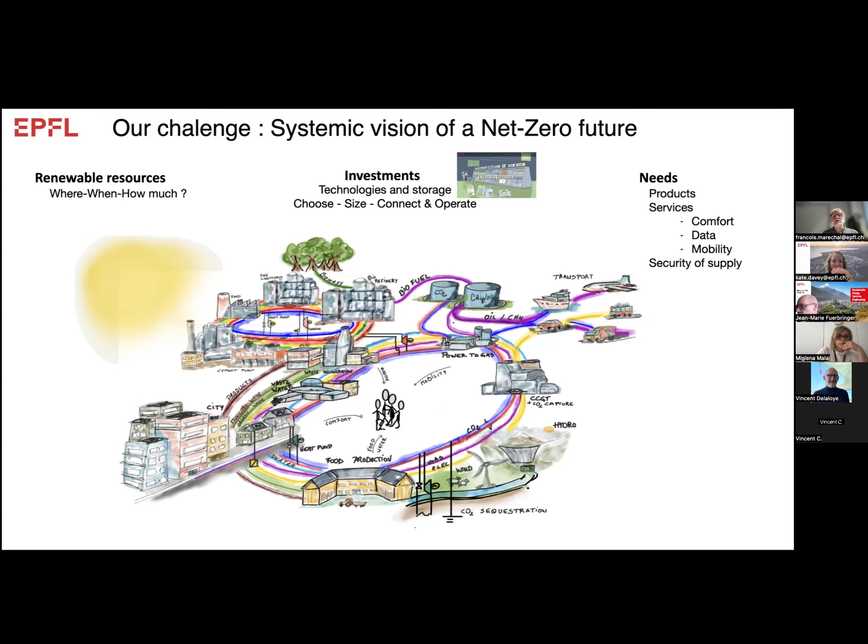And then we have to activate the technologies. This means deciding which kind of technology we are going to buy, at which size, for which purpose. So the question is more or less: we have to choose the technologies, size them, connect them, and then be able to operate them.

And if we have to take those decisions, then we have to have metrics that allow us to take them. I will name them the sustainability metrics, because we would like to be living in a world that will maintain its habitability.

Therefore, we will not only have to take decisions based on economic criteria, but also on the value we give to our environment—an environment where well-being is important, where the quality of the environment is important, where the health of the people is important.

And we also have to integrate the planetary limits into our decisions. So we have to recognize that we are impacting the world in which we are living.

An important dimension, as we phase out fossil fuel use, is that we will also have to look at more circularity. It means thinking about transforming waste into new products, or transforming the energy of the waste into energy services. This also introduces a new nexus, the wastewater-energy nexus, that needs to be integrated into the system in front of you.

And as we care about future generations, we also have to look at the greenhouse gas balance, which results in the need for CO2 sequestration. So this is the problem as stated. Now we have to see how we are going to do it.

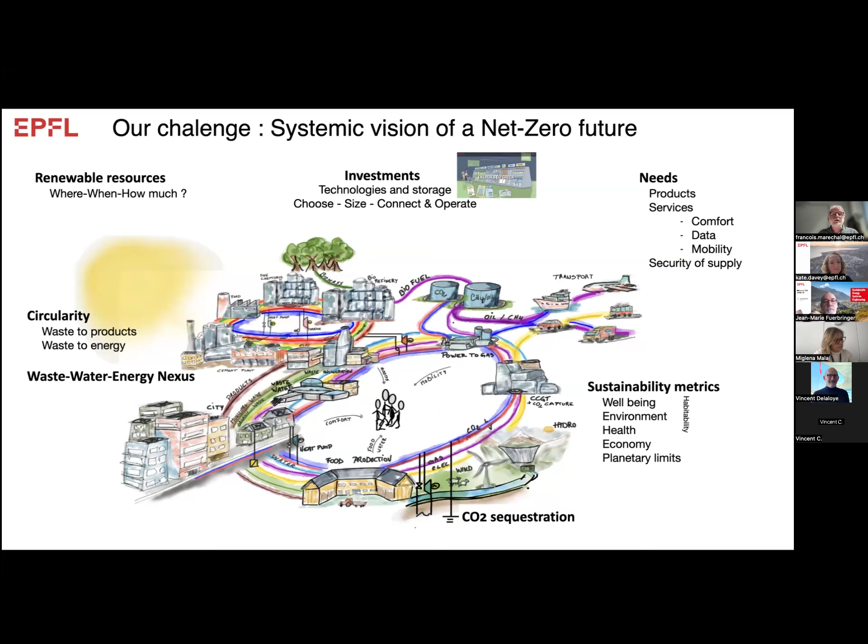Today, with the technologies we have, we can imagine a virtual system that is able to know what data and innovations are available. We can imagine that a computer can assemble those solutions to show us the good ones, quantify the impact of those decisions, and activate the capital. This is the concept of a digital twin that would show us where to go.

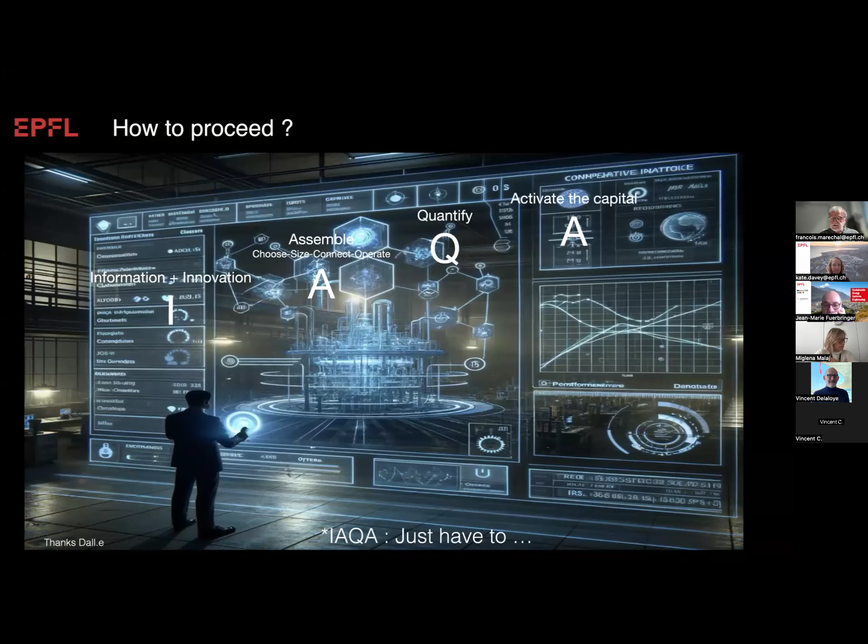And this is where we are doing research at EPFL. We are working on integrating innovation into databases, into models that show how the technologies can be interconnected and operated with one another.

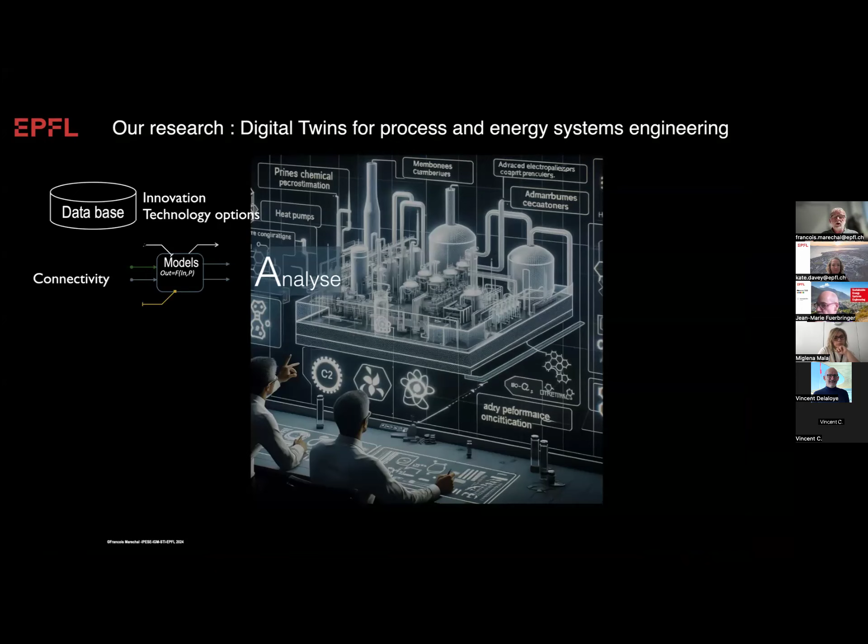We are able to use those computers and those models to generate a list of good connections—choosing the technologies, sizing them, connecting them, and showing how they can be operated. This results in a list of options that can then be proposed for interpretation and evaluation.

So we are going to measure for each of the generated configurations the performance in terms of economy, in terms of thermodynamics, in terms of environmental impact and sustainability, to finally help the people taking decisions. And the decisions will be, by definition, a compromise between different criteria, where we would like to know what is the difference, what is the risk, what is the impact of those configurations that we can generate.

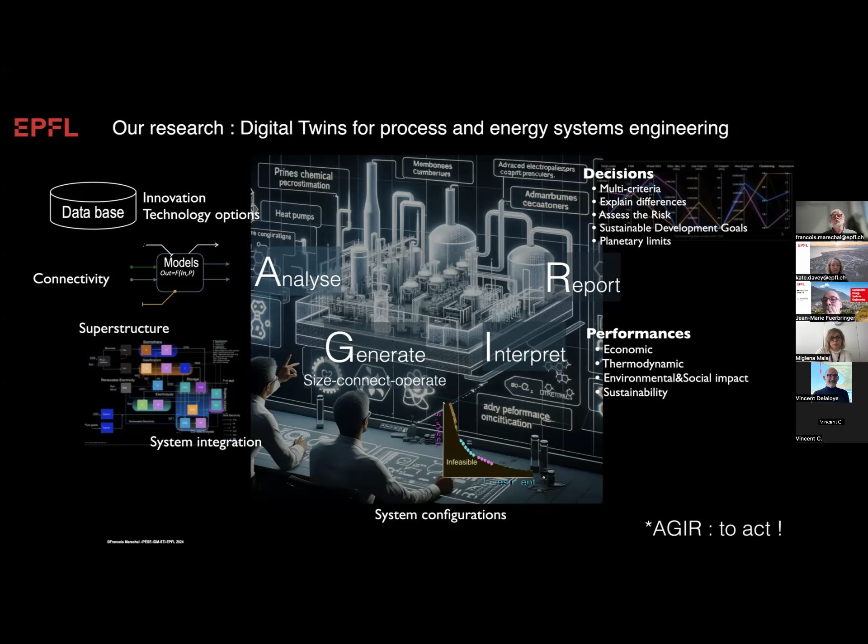So the digital twin approach allows us to see what are the good options. Now the question is, how do we implement it? And I would say start by a simple example. So typically you know where you are and you know where you would like to go. And something that would be really nice is to be informed: with the same amount of money, can you still decrease the emissions, or with the same level of emissions, is there a cheaper solution than the one that you think is the best?

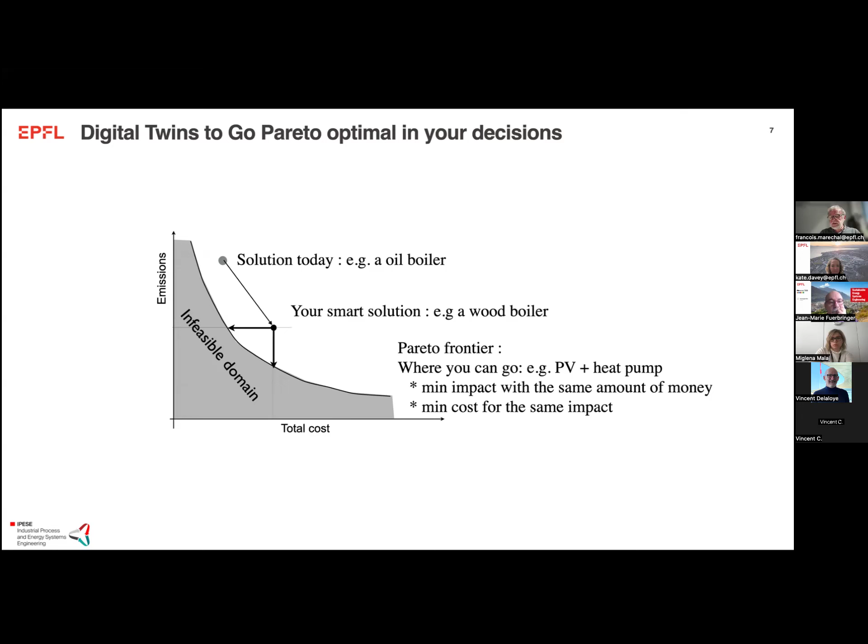And so the idea here is really to be able to take those decisions. And for doing this, we have to go into a systemic analysis. And the systemic analysis is going to look at different domains. So for example, the urban system domain, what are the technologies that have to be activated, how they will be interconnected into the infrastructures, and how this will appear for the different stakeholders.

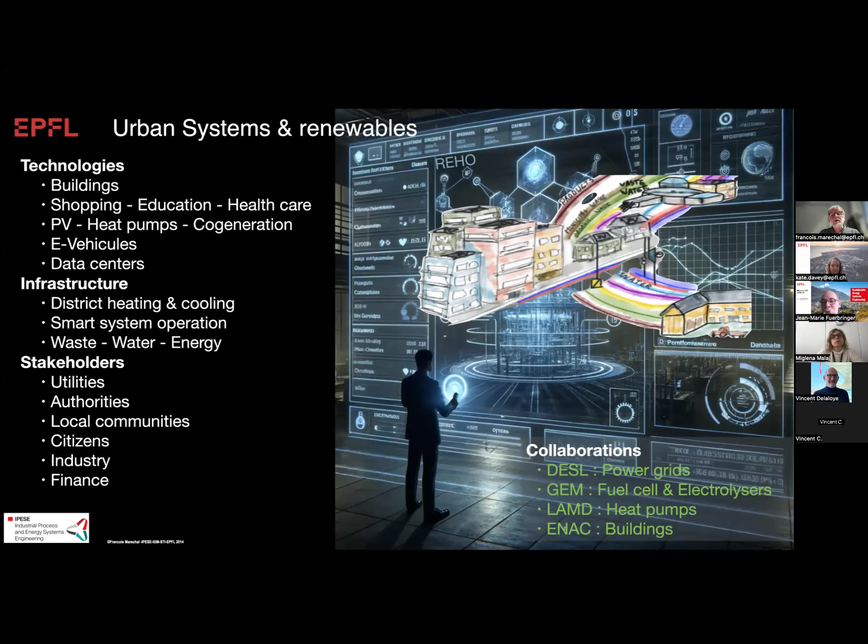So if I'm taking the city, you will have to look at the buildings, but at the same time the PV panels, the heat pumps, the shopping malls to be integrated with the electric vehicles that will come, with the data centers. And you can see that I can start brainstorming. And if I am the utilities, the representative of the authorities, or a simple citizen, I will probably have different preferences. So the goal is to be able to assemble in a system the different options.

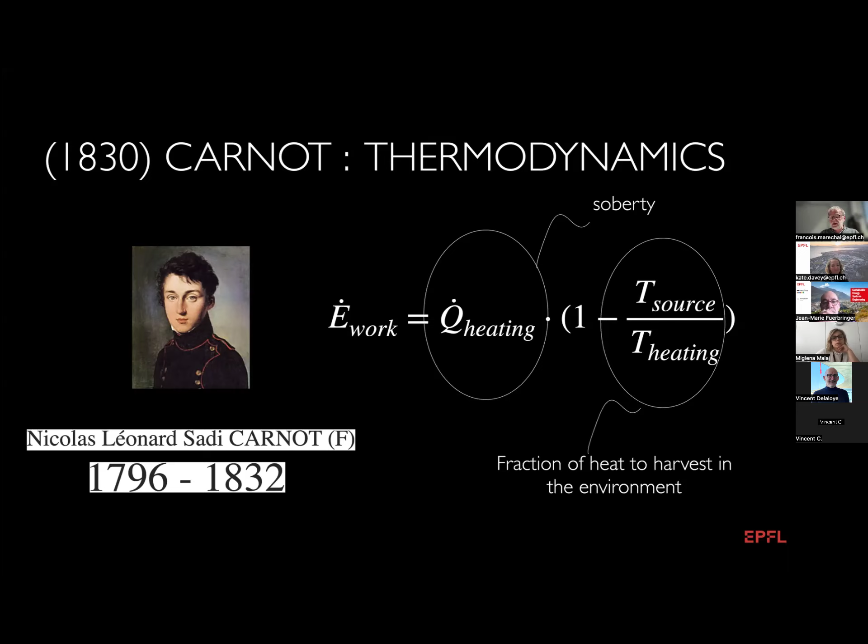And this is what we try to do by activating, on the one hand, thermodynamics. So Carnot has shown us the way. Carnot is going to say, first you have to be sober. Then you have to get the energy from the environment as much as possible. And then the rest needs to be converted. And this results in a building that has PV panels on the roof, a heat pump inside the building, batteries, and also a hot water storage tank.

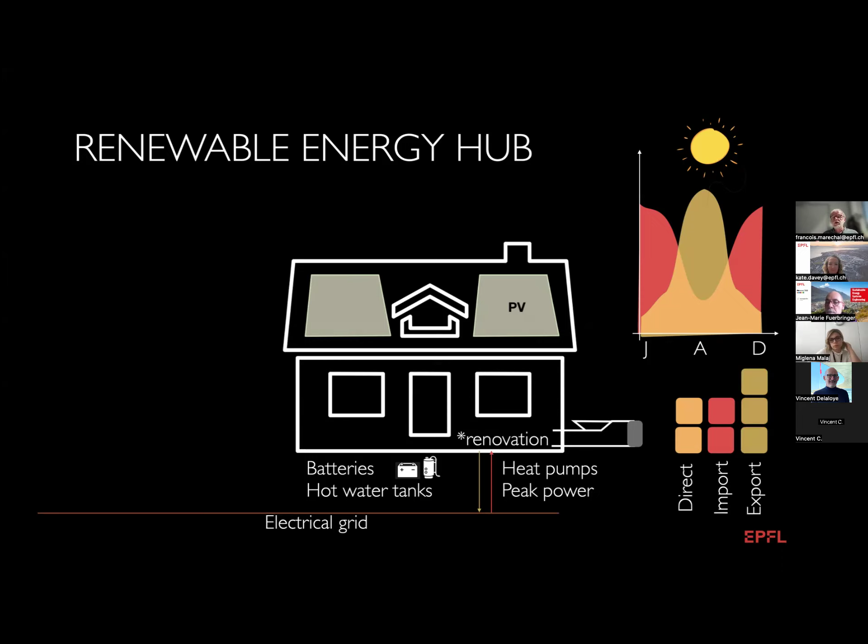So why do I need batteries? Why do I need tanks? It is because the sun is not shining at the time at which I'm going to use the services. And this then requires coordination. There will be times where the energy is available for my needs. There will be times where I will have to import energy, and therefore I will connect the buildings to the grid. But there will be times at which I will export, and I will profit from the fact that someone else will probably need the excess energy that I have produced on my roofs.

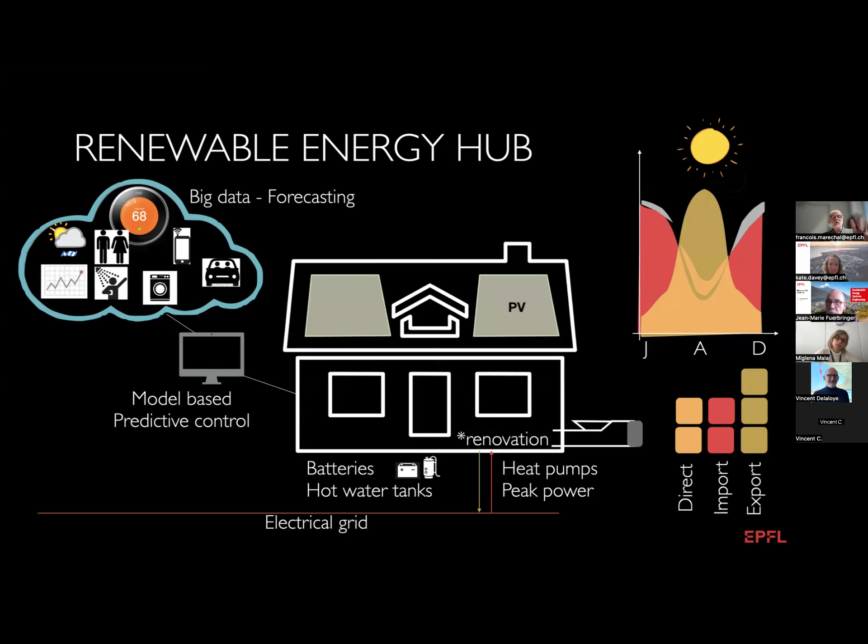And this is going to need coordination. We need an integration with intelligent systems that are going to make the link between when the sun is shining and when the people take a shower, to finally be able to operate the system and maximize the self-sufficiency. When I'm doing this, you can see that I have integrated a lot of competencies, from the data scientists to the technology developers.

Then I will be able to show how much it will cost in the future to be heated as compared to today. And when I'm saying today, this was the results in 2023. And in 2023, the system was already cheaper than today to heat the people, but with a big difference: a huge investment to be made and a low amount of energy to be bought.

On the other hand, if now I believe that I rely on Putin, so this is the security of supply, you can see that it is even better to go towards renewable energy, because it will be even cheaper to be heated in the Putin era. The reason for this is that I'm going to get much more value out of the excess electricity that I'm going to supply to the grid.

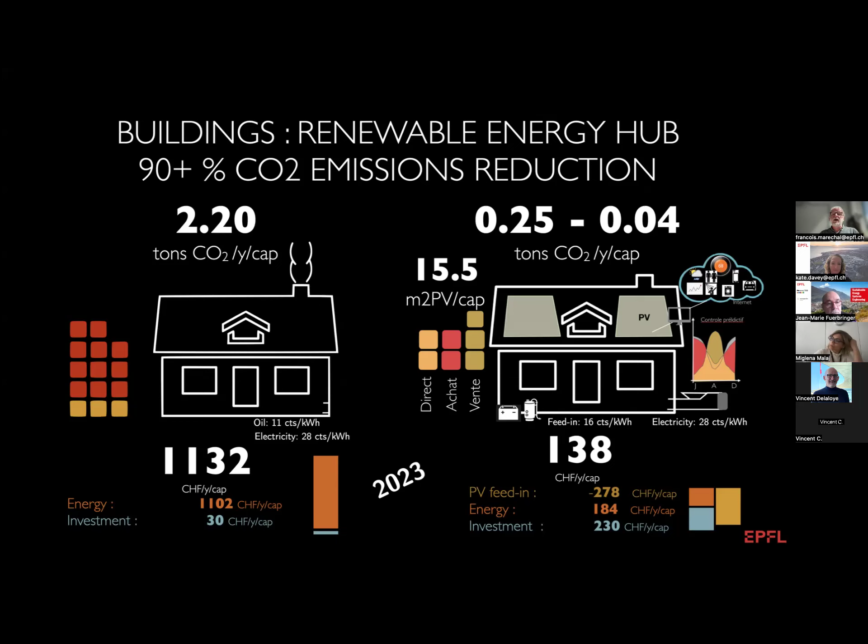So this is interesting because now you can see that I have a system that is telling me, okay, at the end, you have to move towards new decarbonized systems with 90% CO2 emissions reduction. And of course, I can be really smart. So not only will I integrate a heat pump, but I will renovate my building. I will buy PV panels. I will buy an electric vehicle. I will also probably integrate a data center into my building.

And by combining all those elements, which all correspond to my needs, what I realized is that for the services, so here it's the mobility, the comfort in the buildings, the data supply, I'm able to have a system that is much cheaper. So here you can see that I have reduced the cost, and those are the costs with the prices of today, by two-thirds. So I'm going from 100 to 30 Swiss francs.

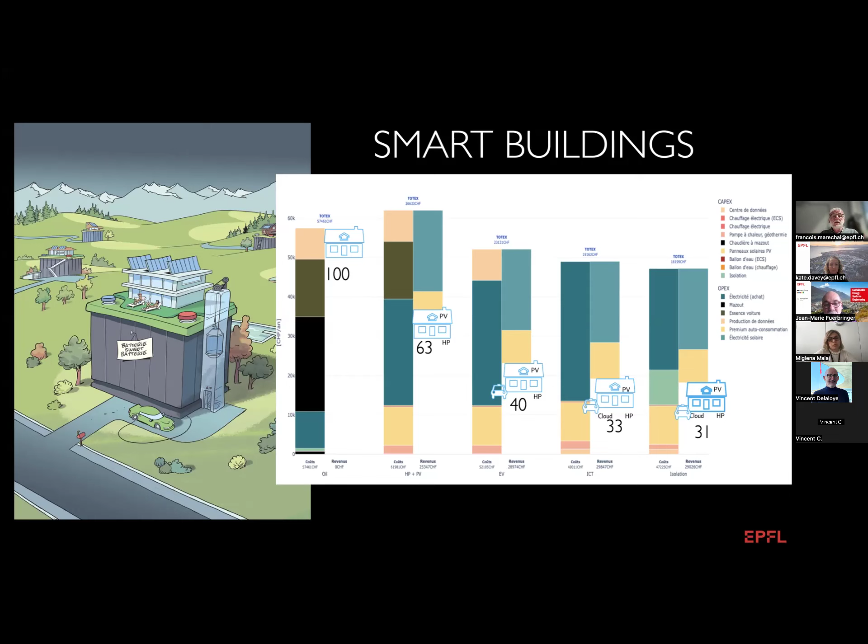And this is even more important if instead of being an individual, I'm looking at a community, like a district. When I'm looking at the district, I need to know who is who and what are the different usages and opportunities there, how I can interconnect the buildings with one another. But the conclusion of this is that at the same feed-in and feed-out prices, we were able to show that if people start to buy the equipment together, they will buy more PV panels, they will reduce the CO2 emissions more because they will need less from the grid. And they will finally recognize that there is an interest in working together.

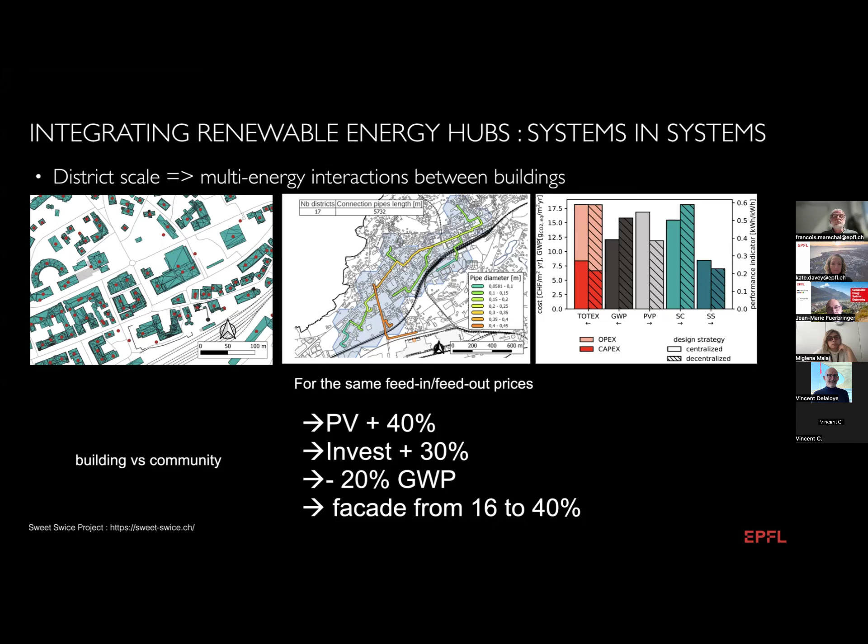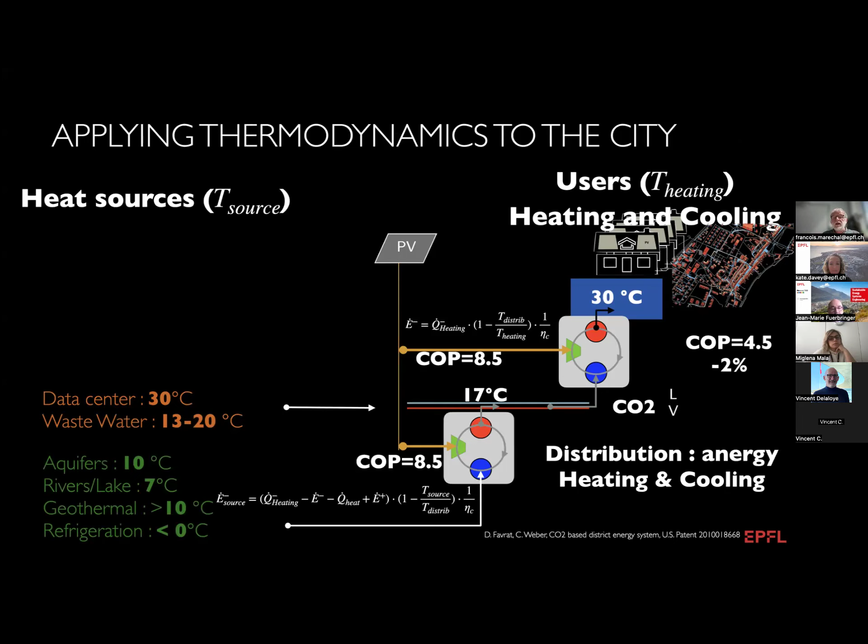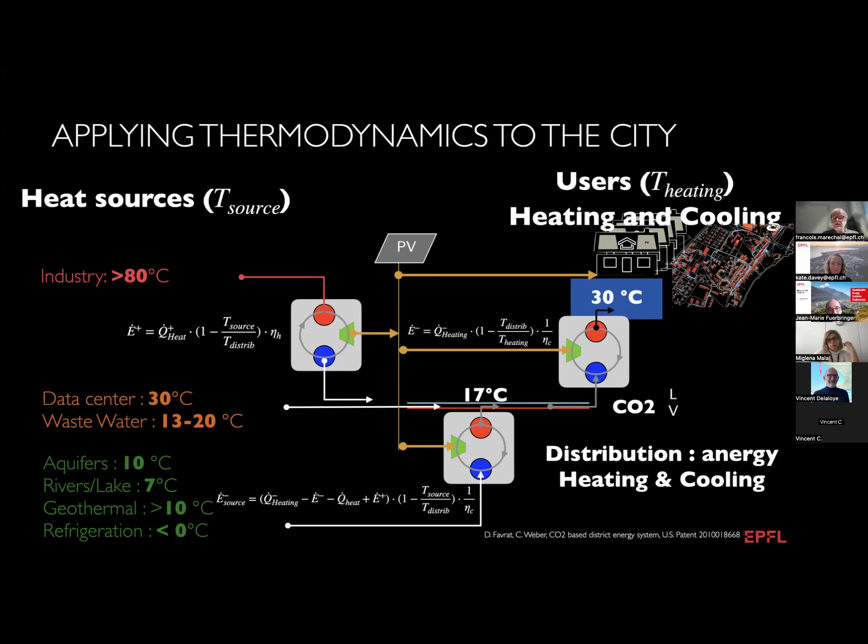Something which is also important is that I'm not just looking at the electricity, I'm going to look at the multi-energy system. Carnot is telling me that you have to choose the good sources, and this is what we are going to do. So with a district heating system, we can harvest the heat where it is available, being in the environment or as waste heat, and I can even convert the waste heat that I have into electricity before distributing the heat to the buildings. What you can see there is that I'm integrating the system in a multi-energy way, and the consequence is that I can make cities much more energy efficient and reduce their energy needs.

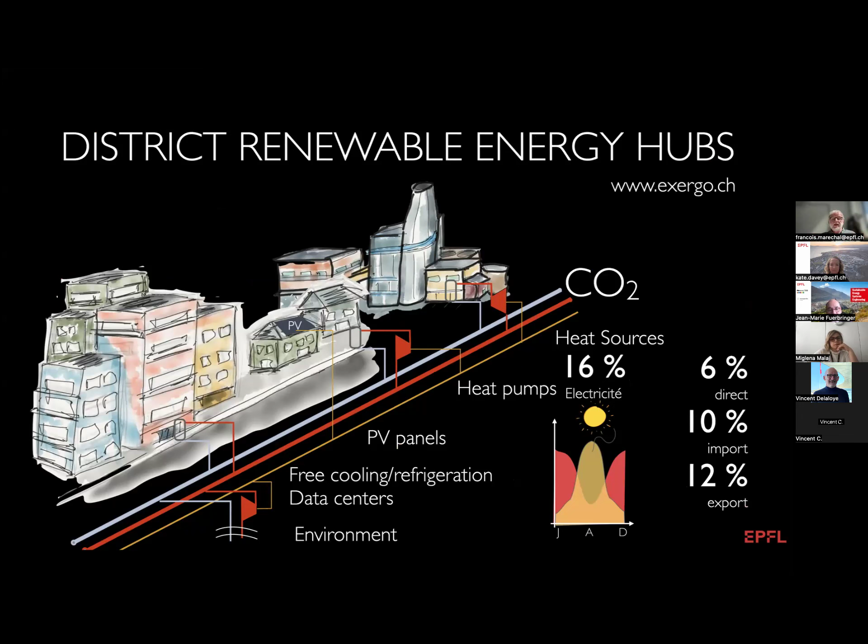The study we have made in the city of Geneva, for the city center of Geneva, shows that we can reduce the electricity consumption by 16% just by integrating the system with the right infrastructure. Something which is also important here is that I still need to do the import and the export. And that's where the technologies are going to come into play.

And this is the second dimension of the systemic analysis: the integration of technologies, being batteries, fuel cells, electrolyzers, but also other types of resources like biomass. And at the same time, it will introduce the need for, or the opportunity for, CO2 capture and storage. And something which is also important there is that each time I speak about technologies, I will ask myself, how does it connect to the infrastructure, being the power systems or the gas infrastructure. And when I'm speaking about the gas or the power infrastructure, I'm going to start speaking about energy management and large-scale energy management. So when do I activate, for example, the hydropower?

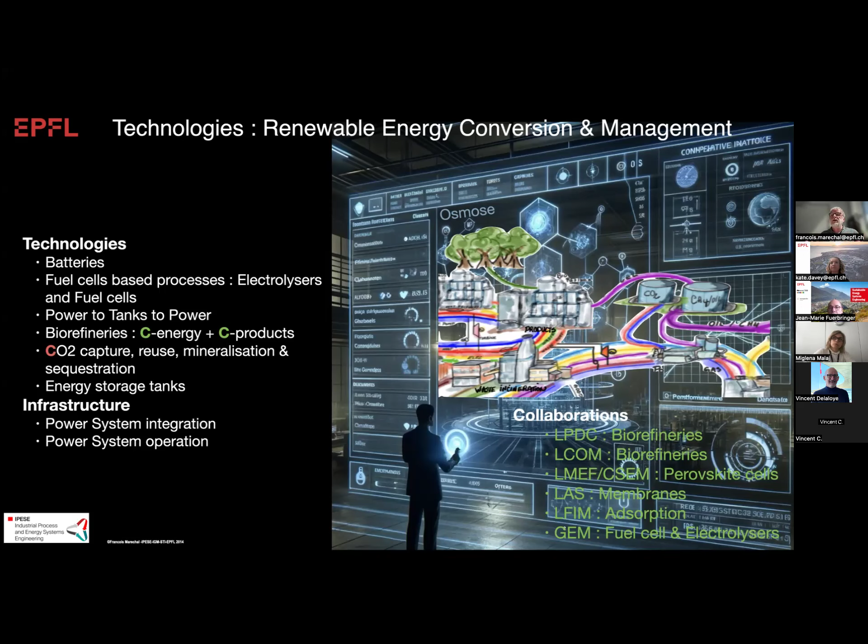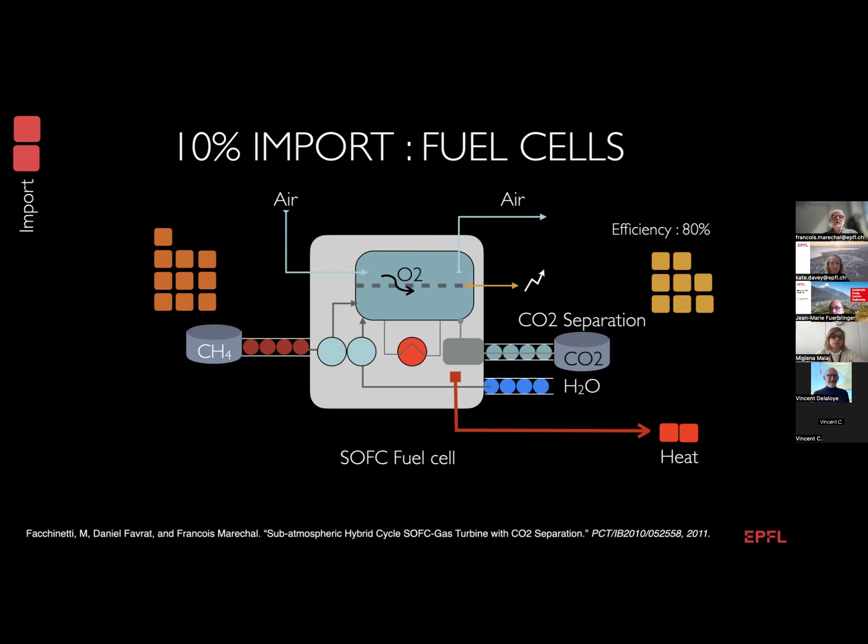Just some comments about the technologies. Fuel cells can be used in order to supply the electricity that is missing. Fuel cells also allow CO2 capture. So it means that if I have a storage tank, then I can store the CO2. And the fuel cell is also going to supply heat. So now if I can reuse the waste heat, and I have shown you that with district heating system integration I can harvest the waste heat, then I will be much more efficient in supplying the needs with methane. But reversing this system is also possible.

And in this case, I will use electrolysis. So I'm inverting the voltage of the system. So instead of producing electricity, I'm going to consume electricity. Instead of producing carbon dioxide, I'm going to reuse the carbon dioxide, and I will produce methane.

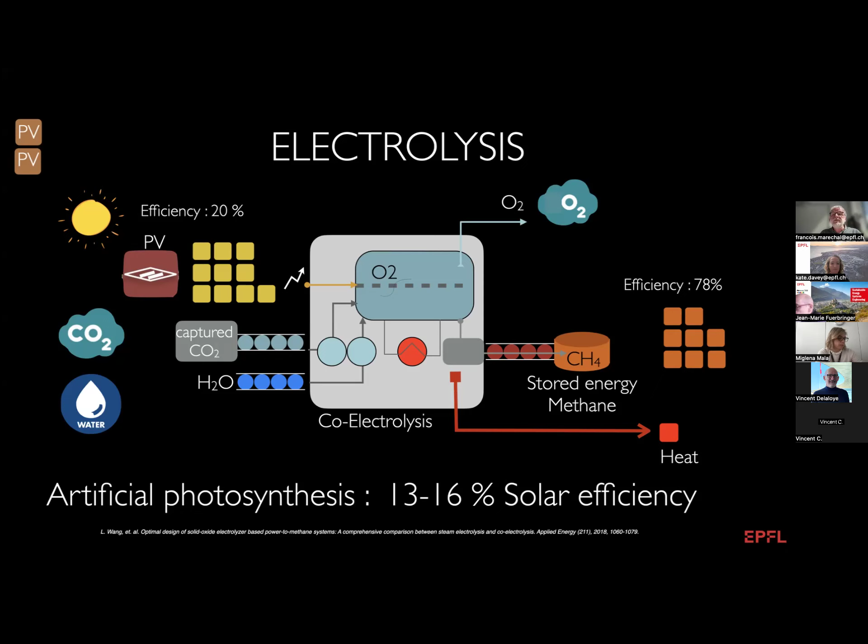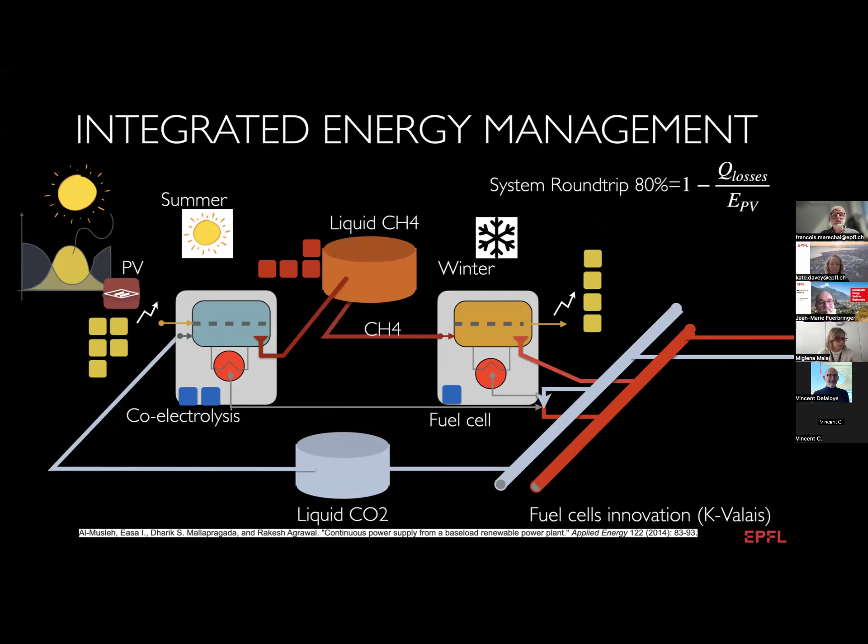And if I'm now integrating this technology in the system, then I will have a system that in the winter is going to consume natural gas to supply the electricity for my heat pumps, collect the heat and harvest the carbon dioxide that will be stored, wait for the summer, when this carbon dioxide will be reconverted into methane by using the excess electricity that I have on my roofs. And by doing this, I will already be quite efficient.

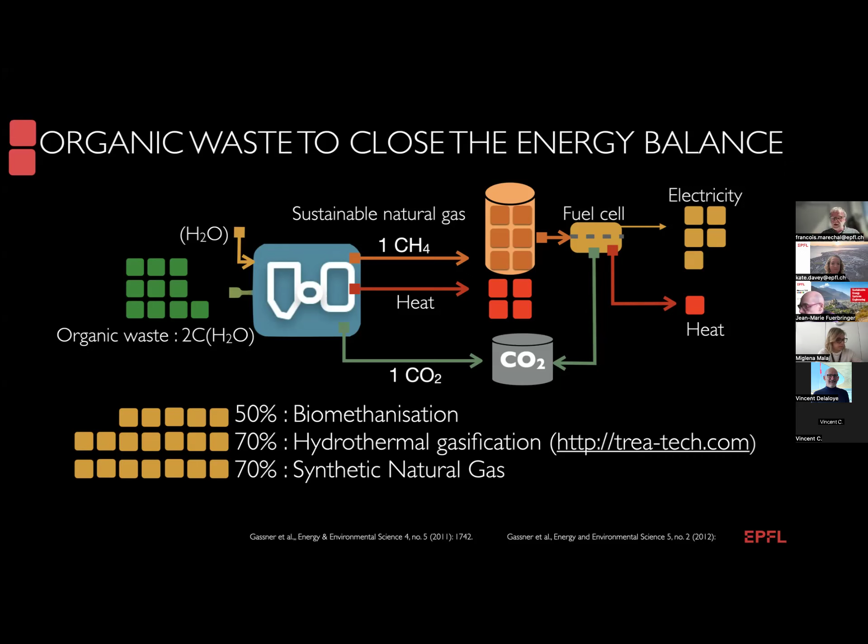But at the same time, I will realize that the people do produce waste. And part of the waste that the people produce is organic waste. And if I now activate technologies that allow to convert the energy value of the organic waste into useful services, I can, for example, activate biomethanization or gasification techniques that will produce methane out of my organic waste. And the byproduct will be carbon dioxide. And I know how to deal with the carbon dioxide.

So I'm going to propose now systems that are not only going to convert the energy of the biomass into stored energy in form of methane, for example, but I will have also the opportunity of converting the byproduct, which is carbon dioxide, into an additional amount of methane, provided that I have electricity available on the grid. So now I have a seasonal storage device that is integrated to my system.

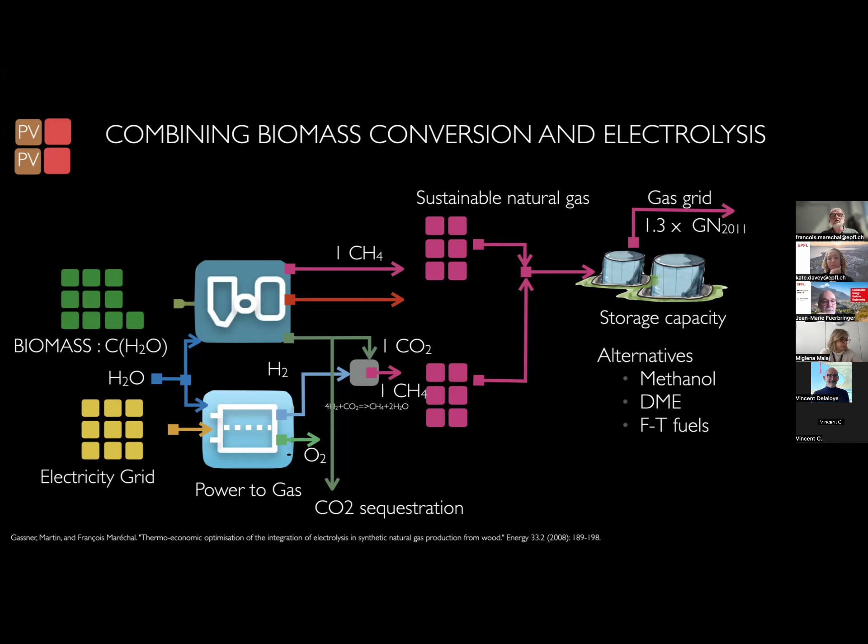Something which is important is that it's not necessarily written that I have to use the total amount of CO2 that is co-produced by the conversion of biomass. I have also the possibility of converting this additional amount of carbon dioxide as a biogenic carbon that can be sequestrated, creating negative emissions. And I'm speaking about methane, but it can also be other types of fuel. It can be liquid fuels, and especially the one that can be used in the airplane, so the kerosene, which will be then biojet e-fuel.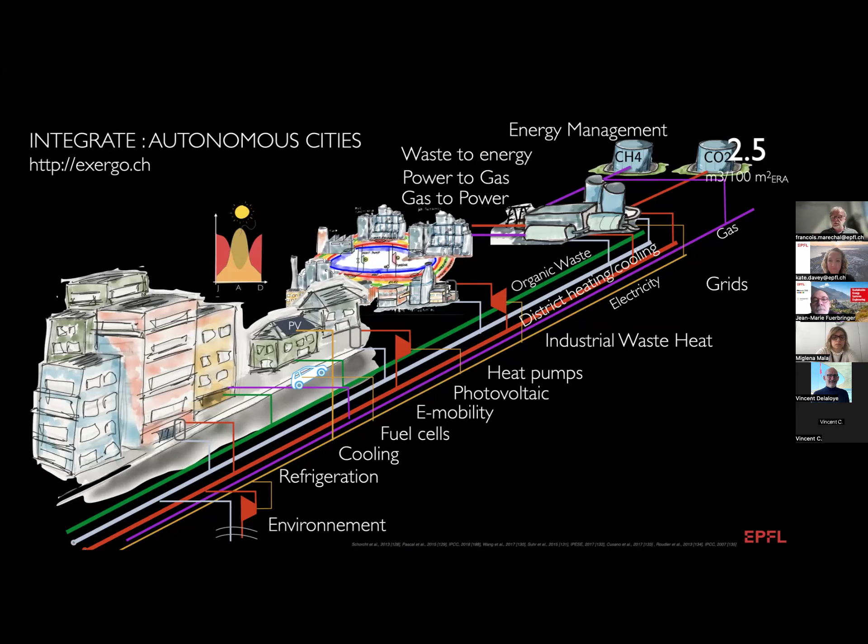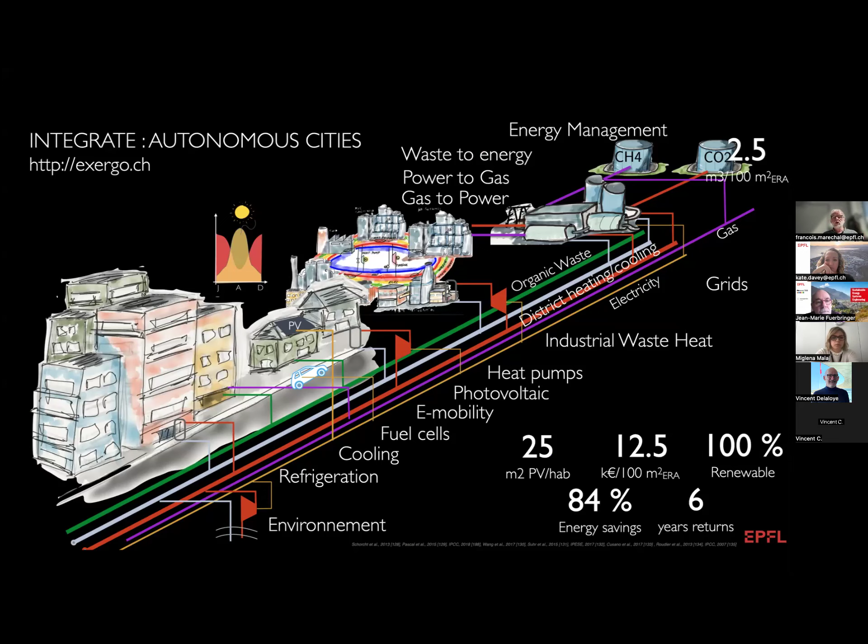And therefore, I will have to have a very big integrated system with distribution, with management, and introducing the gas to power and the power to gas conversion. This, of course, requires an investment and requires the harvesting of the local energy resources inside the system. But we have been able to demonstrate that cities can be 100% autonomous with this kind of approach.

There is something which is important here: the industrial processes. Industrial processes are more or less 20% of the consumption of the society, and we have to look at this dimension. When we look at the industry, first we have to understand the needs. So what are the needs of the processes in form of energy? Then we have to integrate the process innovation. Then we have to integrate the efficiency, that can be in form of heat recovery or heat pumping, but also the integration of renewable energy resources in the processes.

And then we have to recognize that a process is just one element of the full system. So it means that we will have to investigate how the industry can be used as a tank for the electrical power grids, how the industry can be used in the waste management and the circular economy, and how the industry can be used as a way to harvest carbon dioxide that can then create the negative emissions that are needed to close the energy balance.

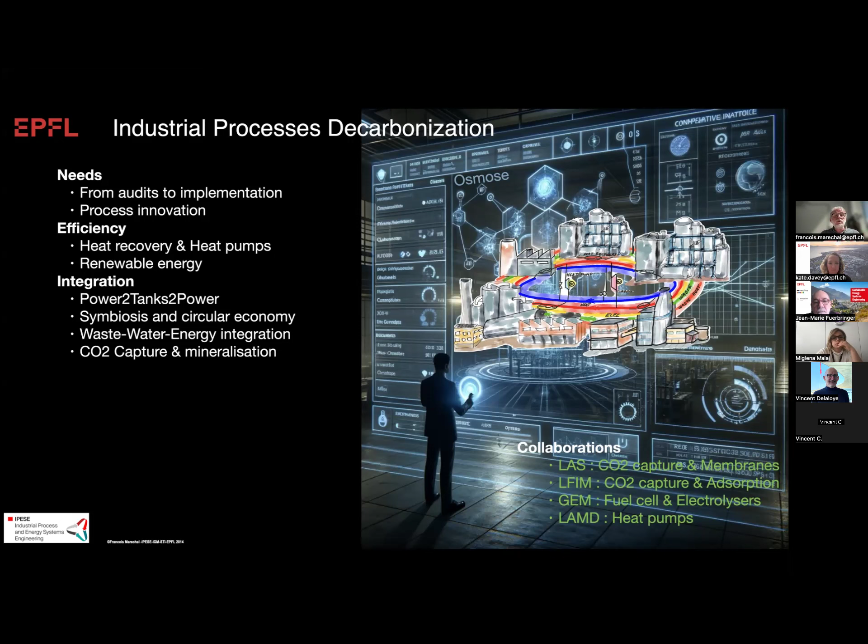So when we do this, then you will have to activate a systemic analysis of one industrial process. And what I would like to show you here is that the process is an element in the system. It is going to see a lot of different types of grids, local grids and big grids. It is going to see, on the one hand, the environment, so the resources like biomass and wood, for example, but it will also see the cities.

And at the end, we will have to be able to do a systemic analysis that will allow us to understand where and how much energy we need, where the technologies can be used in order to reduce our energy needs and be more efficient in using this energy and using the materials in the conversion of the raw materials into products in the industry. Identify how we can valorize the heat that is available and that is processed by the industrial processes, to finally be able to say how we can use the renewable energy sources as a way to supply the energy needs of the industry. And what you can see here is that it's not only the one that is locally generated, it can be also coming via the grids.

In addition, we will have to recognize that due to the interconnection of the industry with the neighbors and with the main grids, the industry can become a battery for the main energy systems. And at the end, we will have also to recognize that the industry has to be integrated into the waste or the material flows of the city, and as well be a source for the waste heat that cannot be valorized inside the industry as a source for heating the people in the cities.

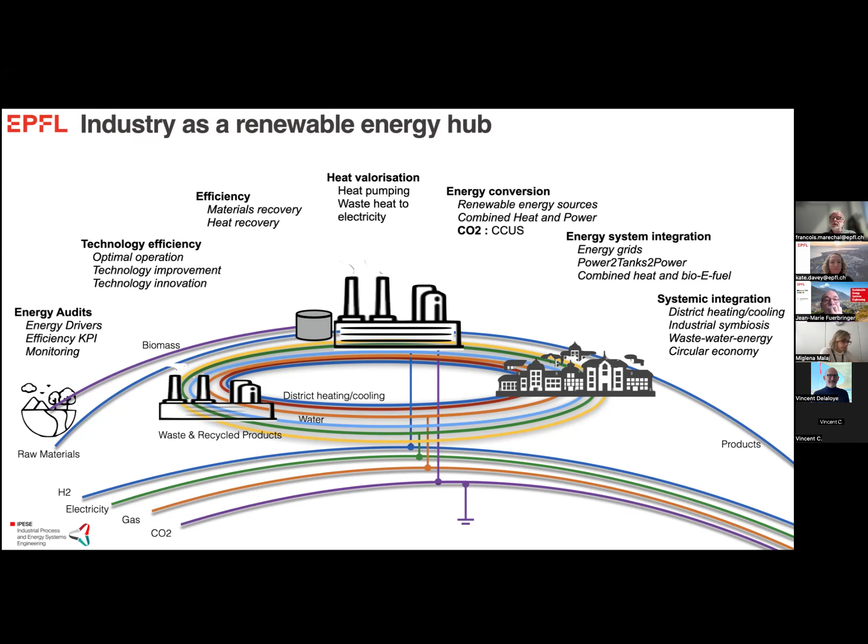So by doing this, then I have to really generate a holistic vision. Something which is also important is that the time I'm connecting my industry to the rest of the world, I need to know the rest of the world.

So it means that I need to be able to understand at the systemic level for the whole territory, what will be the electricity to be stored, for example. Due to this, I need to understand the needs of the people. I need to understand how they are going to change their needs, how much they need - this is related to sobriety - but also the way they are going to use the energy to supply their energy needs.

And this means also to have a good understanding of the spatial integration. So it means that I will have to be able to know where are the resources, I will need to know where are the needs, and I will have to understand then how are the technologies that will be activated.

If I identify at the level of the system which are the technologies that are activated and which are the storage tanks that will be activated at the systemic level, then I will be able to tell the industry at which time they will need to store, they will have cheap electricity to store, and at which time they will have the expensive electricity that someone is ready to buy.

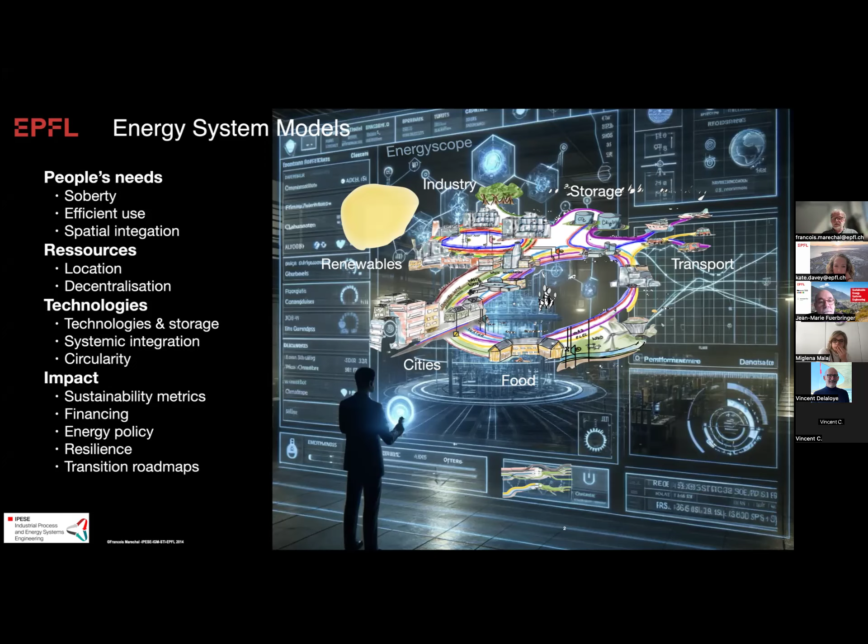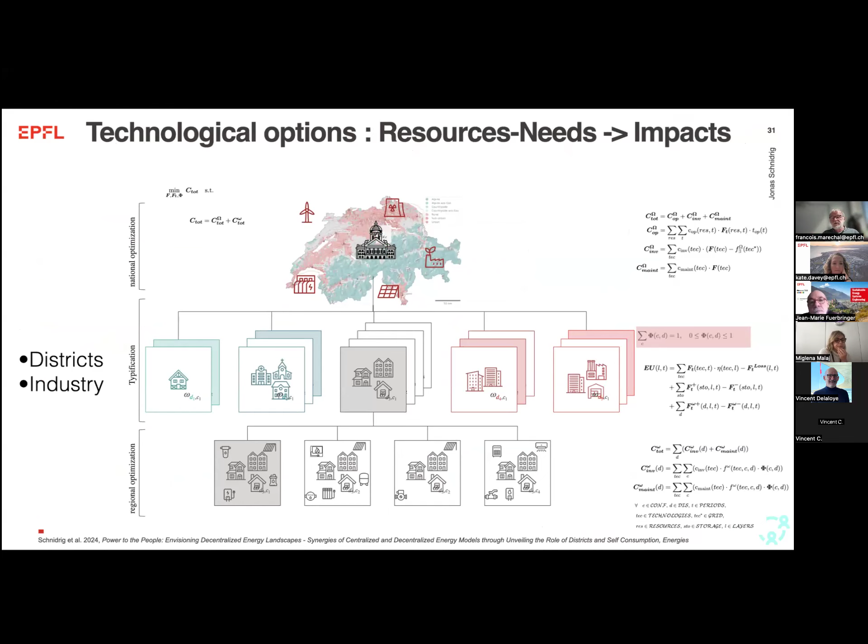So it means that I will have to create maps where I will know what are the needs, what are the different resources. Then I will be able to activate all the options that I was generating for the district, for the industry. And then I will be able to give what will be the future and how we can make the transition from the present situations towards, for example, in this case, a net zero option where an independent Switzerland is only using local resources to feed the needs.

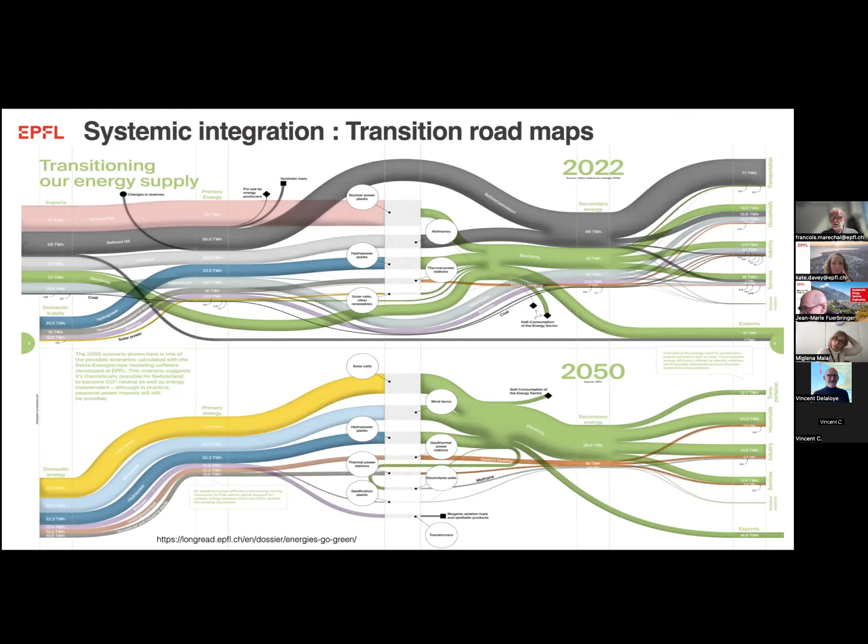So the conclusions. There is one way to stop the thermostat, which is not to use energy and go back to the caverns, but there is another way, and this is what is our mission in EPFL.

On the one hand is to work on the innovation transfer, so not just innovations, but integrating the innovations into the energy systems. We believe that the use of advanced techniques like the digital twin concept allows us to show where are the possible options - and I'm really speaking about options with an S, so there are more than one options - and we have to be able to compare them and to understand what are the metrics that need to be used to take the decisions.

In addition, and this is the mission of this training program that Jean-Marie is going to present, is the knowledge transfer. So we know how to do it, yes, probably, but it's important that all the engineers and all the people, the citizens, know how to do it, are informed about the different options, so that they are not blocked in just one option. Therefore, we are proposing, on the one hand, of course, the training to our master students, but as well a continuing education program that allows us to activate this knowledge, so that the engineers who are responsible for the energy transition will do it in an efficient and well-informed way.

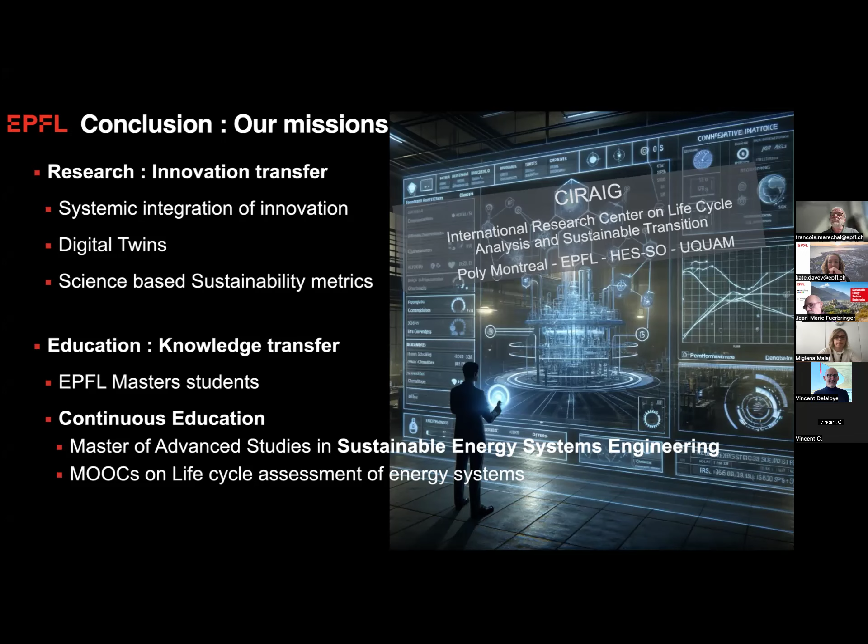So those are my conclusions. So now I'm going to pass the word to Jean-Marie, who is going to present the program that we are proposing for the continuing education.